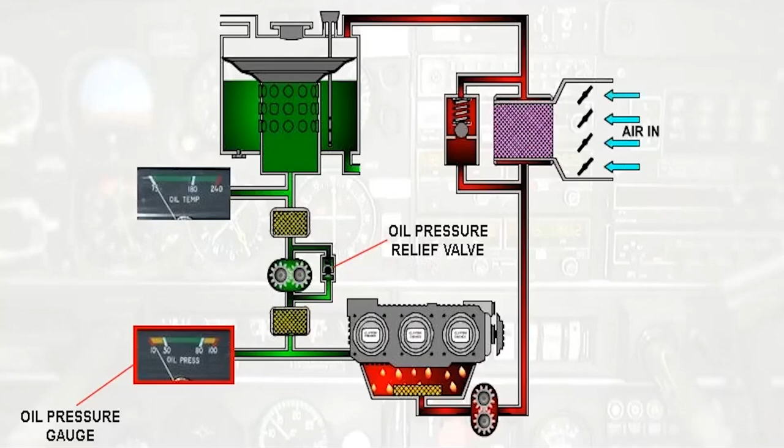Oil pressure is sensed at the outlet of the oil pressure pump. Normally, the oil pressure of an engine is maintained constant by an oil pressure relief valve. There are, however, situations which may affect the engine or the oil to the extent that it is beyond the ability of the pressure relief valve to maintain oil pressure within prescribed limits. It's at these times that the oil pressure gauge, used in conjunction with the oil temperature gauge, can indicate to the pilot the best course of action to retrieve the situation.

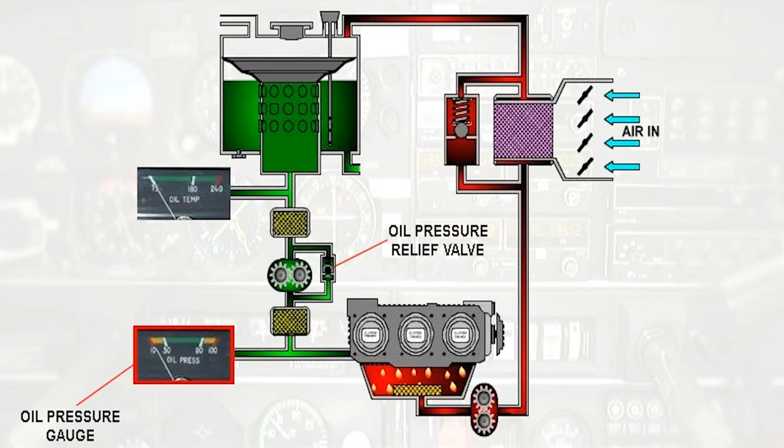The manifold absolute pressure gauge of a piston engine uses two bellows to measure both ambient atmospheric pressure and the pressure in the inlet manifold. Note that this gauge measures absolute pressure and is calibrated in inches of mercury. When the engine is running, this gauge may indicate less than atmospheric pressure.

Earlier versions of this gauge were calibrated to read boost in pounds per square inch, and called boost pressure gauges. When the engine is not running, both types of gauge, the manifold absolute pressure gauge and the boost gauge, will read ambient atmospheric pressure. While the aircraft is stationary on the ground, this particular indication is called static boost.

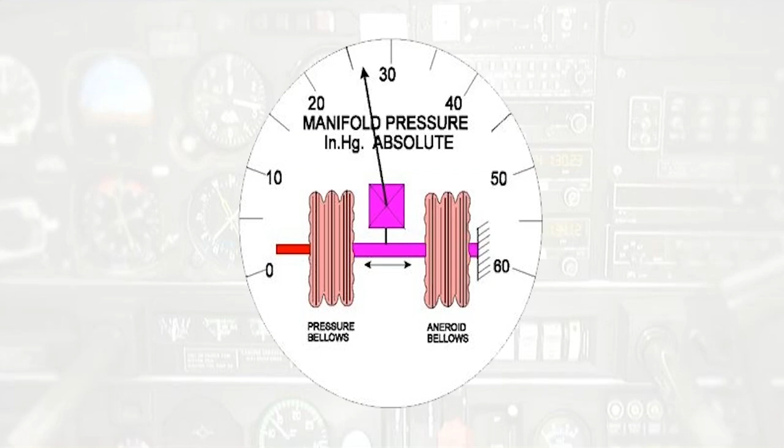A fuel pressure gauge may be fitted to fuel injection fuel systems and can be used to indicate metered fuel pressure. In some cases, by calibrating it in a suitable manner, the fuel pressure gauge can enable the pilot to adjust the air-fuel mixture to suit the aircraft's altitude and the engine power setting.

The measurement of the quantity of fuel in the tanks of an aircraft fuel system is an essential requirement. The simplest form of volume indication is a float system. Early aircraft had a float which sat on top of the surface of the fuel. Attached to the float was a piece of wire that protruded out of the top of the fuel tank. As the fuel level reduced, so the wire disappeared from view.

There have been many variations of this system. On light aircraft, the most common of these uses a float which moves to position a wiper on a variable resistor. This in turn alters the current flowing to an indicator, moving a pointer over a scale calibrated in volume. The disadvantage of this system is that the indication is not linear, and there is no provision for making adjustments for system accuracy. The gauge is set to be accurate at the full and empty positions. The system is also subject to errors whenever the aircraft maneuvers and the attitude changes.

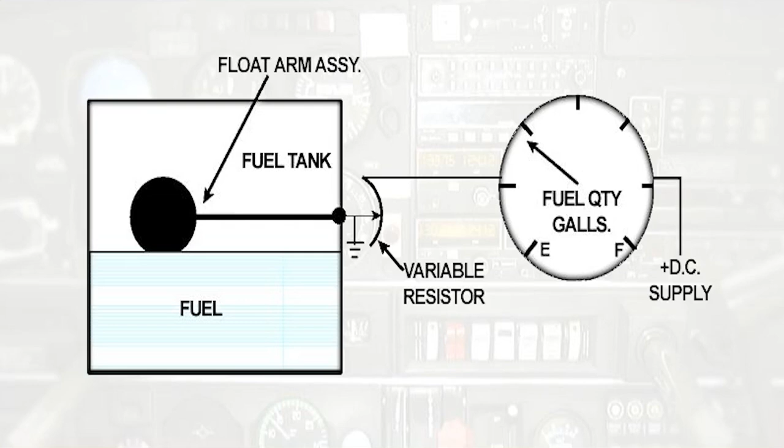As well as the quantity of fuel measured, the rate of fuel flow can be shown. The fuel flow meter can display volume flow or mass flow. A simple flow meter can be an adaptation of a pressure gauge. This system is used on many light aircraft piston engine fuel injection systems.

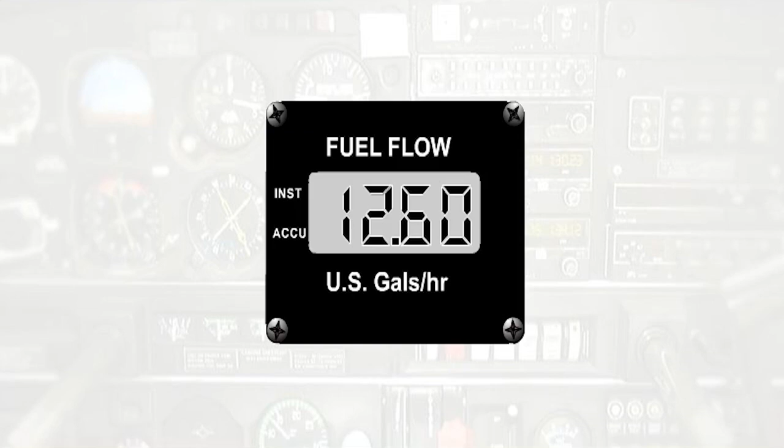The measurement of engine speed is of vital importance, since together with other parameters, accurate control and monitoring of the engine can be achieved. On piston engines, it's crankshaft speed that is measured. The RPM indicator is called a tachometer, or tacho for short. The basic method of measuring engine rotational speed on piston engines is the mechanical magnetic tachometer.

The mechanical tachometer consists of a flexible drive shaft and the tacho indicator. One end of the flexible drive shaft is connected to the tacho indicator in the cockpit. The other end goes to the accessory drive casing on the engine, where it's driven through gears from the crankshaft.

The input drive causes a magnet to rotate. The magnet rotates inside a copper or aluminium drag cup. This induces eddy currents in the aluminium drag cup. Eddy currents are caused by the magnetic field of the moving magnet, acting on the electrons of any metal in the vicinity of the magnet.

The eddy currents themselves generate a magnetic field, which interacts with the magnetic field of the magnet. This interaction causes a torque, or turning moment, which is established to turn the drag cup in the same direction as the permanent magnet. A shaft extends from the drag cup and is connected to a pointer. The turning motion of the pointer is against the tension of a hairspring, which controls the drag cup position and hence the position of the pointer.

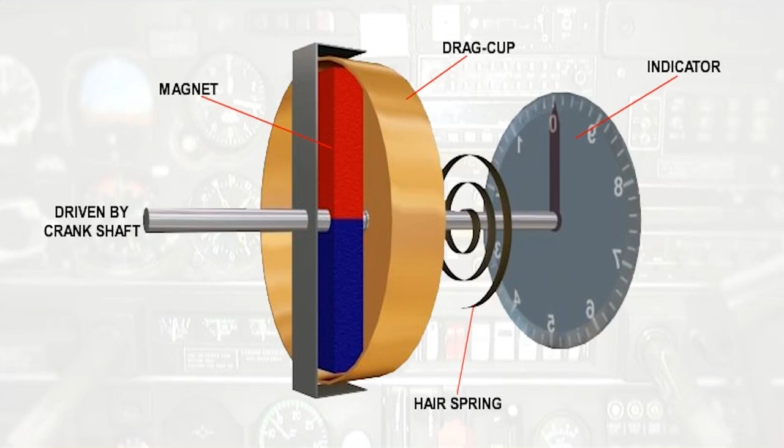The flexible drive is driven at reduced speed, but true speed will be shown on the indicator. The indicator incorporates compensation devices for changes in temperature.